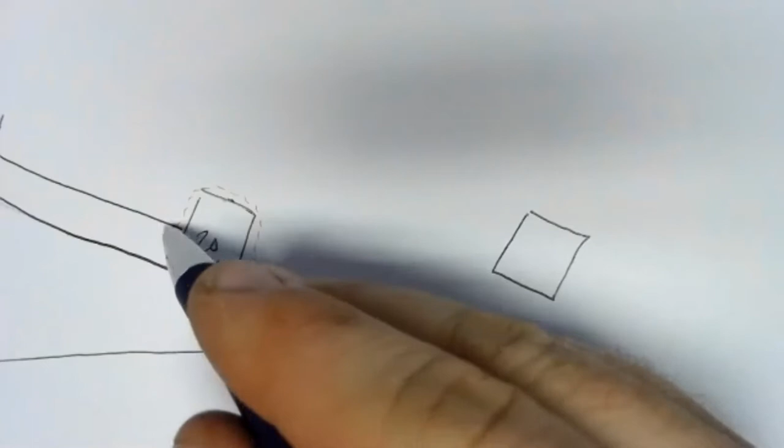So let's go over to the right side here and we'll draw our free body diagram. The free body diagram is going to start with the body, and I'm going to draw it in basically the same kind of orientation. But remember, the point of the free body diagram is to eliminate all those things that are supporting the object. And anytime something touches or crosses that system boundary, there must be a force there.

So I think everyone could agree here there must be a force on the box due to the tension in the wire. The wire or the rope crosses the boundary pretty clearly there. And then we also have weight pulling down. We have this 20-pound force pulling down.

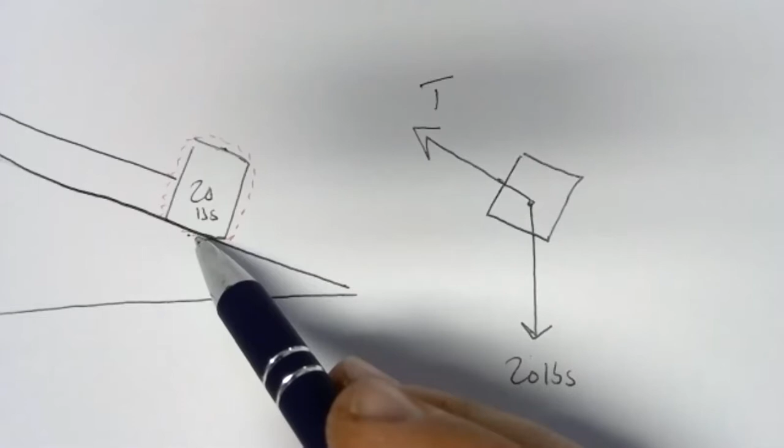But there's another force here, because just these two forces, if you think about them, can't be in equilibrium. Because if you had something pulling down at the same time as something pulls up and to the left, this thing would move. This isn't a tug of war, no one's winning. These two forces are helping each other and pulling off in this direction, off to the lower left. If you added up those two vectors, you'd get something off to the lower left. There must be another force in the system, and there is: this force of contact between the surface of the ramp and the box.

The surface of the ramp exerts a force on the box, just as if you were standing on a floor somewhere. If you stand up wherever you happen to be, your feet are planted on the floor. The floor is pushing up on you to cancel out your weight. You are in equilibrium because gravity's force is canceled out by this force exerted by the floor. Surfaces like floors generally exert forces perpendicular to their surface. So if you're standing on a floor, you're pushing down due to your weight, and the floor is pushing you up to cancel that out, perpendicular to the floor.

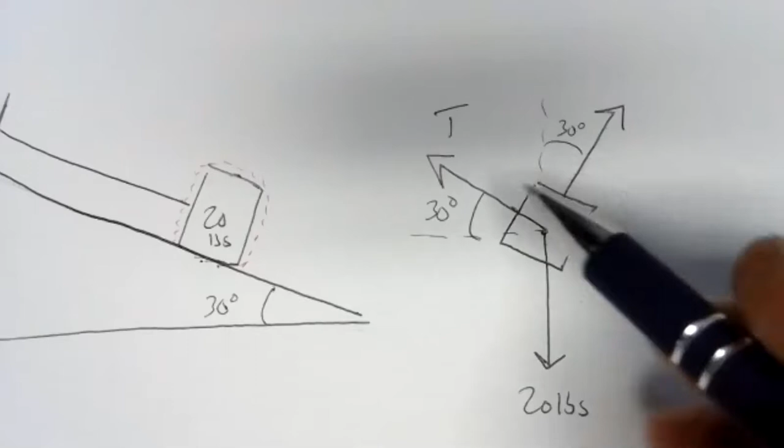There is a perpendicular force here also, but because of this 30-degree angle, that force is up and to the right by an angle of 30 degrees. So if we put some angles in here, that's 30 degrees because the tension is parallel to the ramp. This one's 30 degrees because this force, what we call the normal force — N stands for normal.

Normal has fewer syllables than perpendicular, so it's easier to say. The normal force is perpendicular to the surface. When things are normal in math and vectors and such, they're perpendicular.

Now that has a chance. This free body diagram has a chance of being in equilibrium. You could buy that these three arrows pulling in the way they're doing should cancel out, or at least have a chance of canceling out. There doesn't necessarily look like there's going to be a clear winner here.

So that's what the free body diagram looks like. Now, in order to do any math with the vectors that we've got here, we've got to define a coordinate system. And if we use our traditional coordinate system, where horizontal is x and vertical is y, we can break up those forces into components.

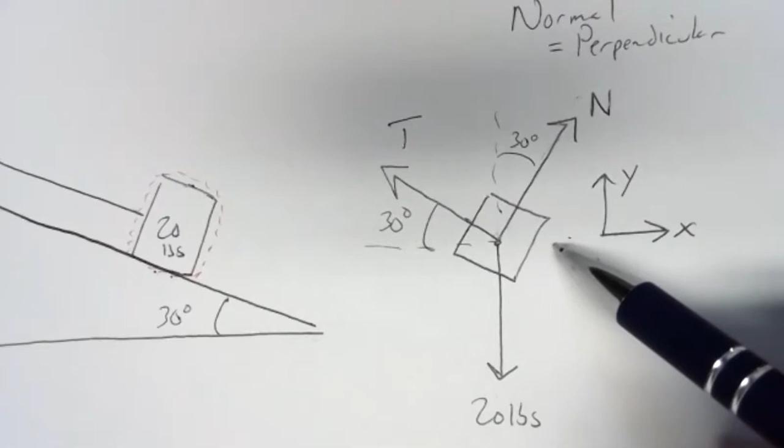You can figure out how much of this normal force is in the y direction and how much is in the x direction. How much of the tension is in the x direction and the y direction. How much of gravity is in the y direction. And then you've got your equations of equilibrium. You take your sum of forces, set them equal to 0. With this setup, you will end up with a set of simultaneous equations.

But we did a problem similar to that last week. So if you are not feeling too clear and comfortable solving realistic problems with simultaneous equations, go back and look at the videos on that — I think that was last Wednesday's class. You can go back, follow the procedure there, and you'll be able to figure out values for T and for N.

Does that help a little bit with the setup? Yeah, any questions there? I think I have a better shot at getting it now. We'll probably have people with questions on Wednesday night — not everyone's necessarily gotten a chance to look at it yet, but we'll likely have questions on this one. So I'd probably end up working it out, and I'll also show you another way to approach this problem that can make the math a little bit easier. But you certainly have the tools at this point to handle this problem, and we've done an example similar enough that involves similar math to solve it. Any other questions on the homework?

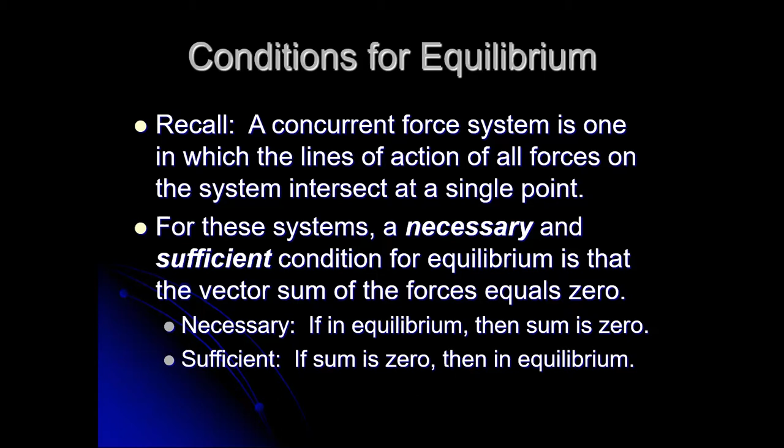We're going to see in a second, though, it's not true for non-concurrent force systems. In non-concurrent force systems, we can have the sum of forces equal to zero, but not be in equilibrium. And you might wonder, well, how can that be? How can we possibly have the sum of forces equal to zero, but not be in equilibrium? Well, let's try it out with an example.

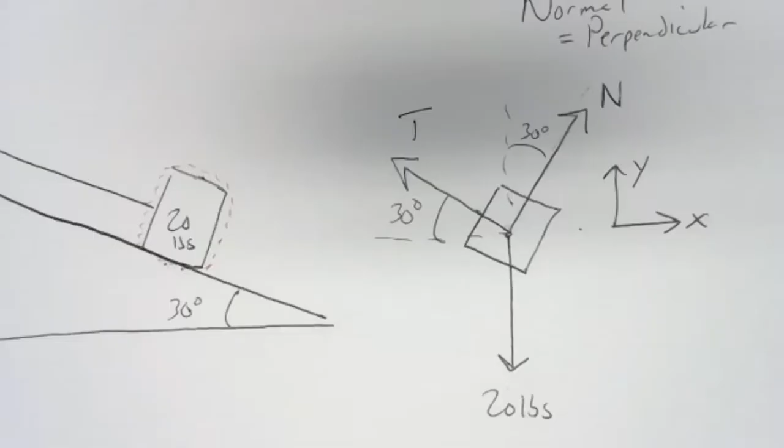Now, since everything we're going to be doing is in a flat plane, we only have two options for moments, just like we did with weight and balance. We either have counterclockwise moments or clockwise moments—only two options. So get used to thinking about, as we work on different problems, the direction moments are in, whether they're clockwise or counterclockwise.

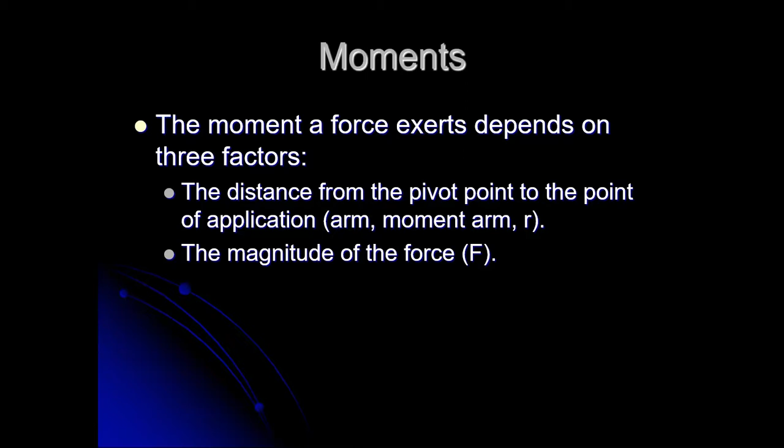Then here's the factor that we didn't have to deal with in the A&P program. We have an angle involved. There is an angle between the line from the pivot point to the point of application and the line of action of the force. That angle matters. How big or how small that angle is will affect how much moment we have.

Now, we ignored the angle in the A&P program. We said it was always going to be 90 degrees, and we do some fairly extreme things in the A&P program to make sure that's true.

Think back to what you did in weight and balance last semester or in a previous semester. Before you could do your weighing of the aircraft to figure out the center of gravity, which was basically just figuring out moments due to the weight at different locations, what did you have to do to the airplane? Anyone remember? So what did we have to do before we rolled the airplane up onto the scales or as we were lifting it on the jacks?

I know it was a while ago. Make sure everything was located in the right location. There's that, you had to make sure it was equipped properly and all that. But there was something a little more fundamental, something you had to go to the TCDS maybe to figure out, or something you had to measure as it was being lifted or rolled up. The empty weight, well, that's eventually what you were measuring.

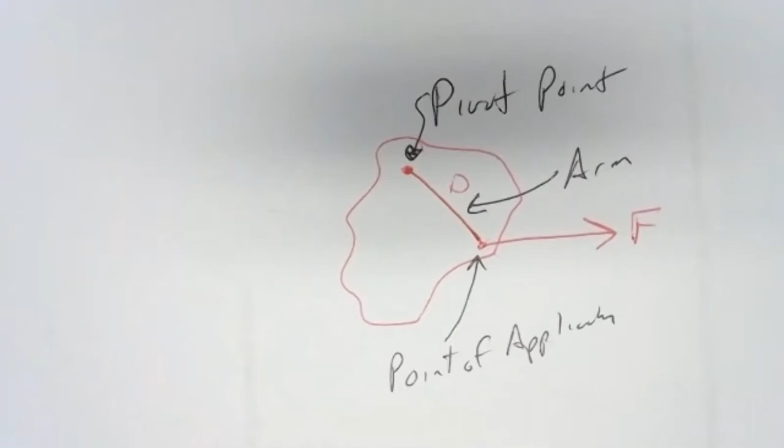Then there's the arm. The arm is the distance between the pivot point and the point of application of the force generating the moment. So if we go back to our drawing here, we've got our pivot point - that's right there. This would be our arm. And right there is our point of application, that's where the force is applied. Now, if we look at the line of action and the direction of the line from the pivot point to the point of application, we get an angle - that's our angle there.

Now, the closer that angle is to zero, the less moment we're going to have, because if the force is pulling right along the arm, it's not causing rotation. On the other hand, if it gets closer to about 90 degrees, then we're getting maximum moment or maximum torque. So the amount of moment we get depends on what this angle is. The closer that angle is to 90, that is, the closer the force is to being perpendicular to the arm, the more the moment is. The closer the force is to being parallel to the arm, the less the moment is. We'll come back to that in a second.

So some important points with respect to moments. Most of these we know from A and P, but this is to summarize that, to review that. When we've got angles involved, only the perpendicular piece of that force, the part that is perpendicular to the arm, contributes to the moment. That's an important idea, and I'm going to illustrate that for you in a second. Forces that push or pull directly on the pivot point, that is, their line of action shoots right through the pivot point, have zero moment.

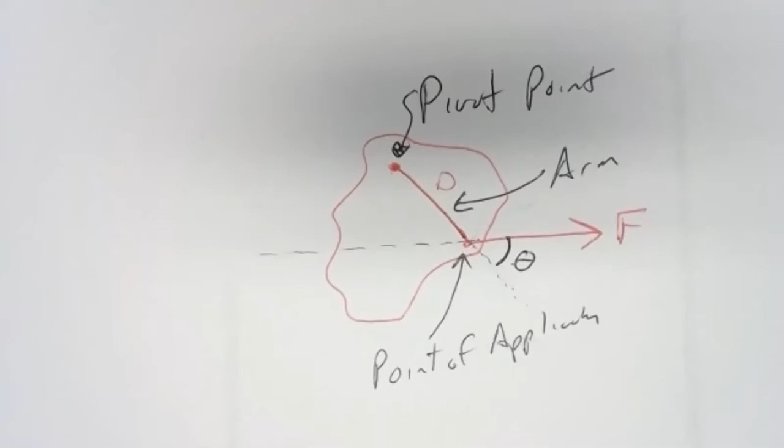So think back to what we've worked on with respect to vectors. This force is a vector, and vectors can be broken up into components. There's nothing saying we can't make this force into two components, one that is parallel to the arm, we could call it F parallel, and one that is perpendicular. We have a perpendicular component. Any force can be broken up into components.

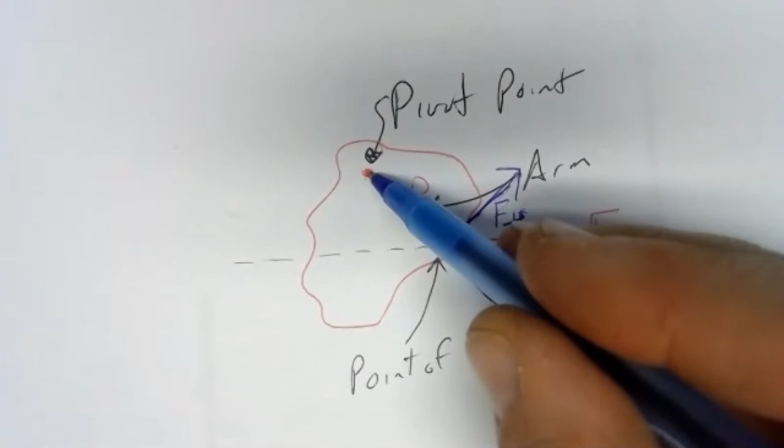If we picked our coordinate system so that our axes are along the arm and perpendicular to the arm, we could figure out how much of the force is perpendicular and how much is parallel. The parallel part doesn't contribute to the moment because its line of action goes right through the pivot point. So the moment due to the parallel part is zero - parallel force gives us no moment.

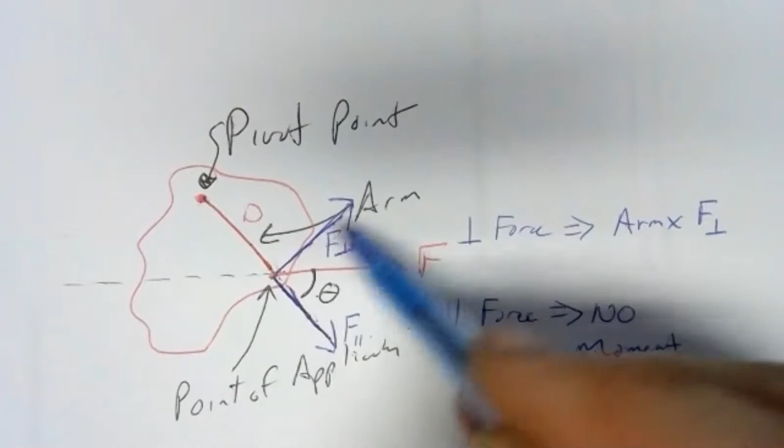The perpendicular force, that gives us our moment. And the amount of moment is the arm times how much force is perpendicular. So if we know this distance from the pivot point to the point of application, and we know how much of our force is perpendicular, we just have to multiply those two.

If we know this angle, we can use some trig to figure that out. Our perpendicular piece is over here - that's our opposite side. The trig function that goes with opposite is sine. So typically with the angle defined this way, the perpendicular component involves the sine of the angle. That's why when the angle's small or zero, we get very little moment because the sine of zero is zero. When the angle is perpendicular, we're at 90 degrees, the sine of 90 degrees is 1.

So the angle here controls how much of the force actually creates moment. All we have to do when we want to find the moment is find the perpendicular force. If we know how much force is perpendicular to the arm, we just find that amount of force, multiply by the arm, and we've got our moment.

So let's try that out here.

We do have to have a pivot point specified. You cannot just say you've got a moment of 32 foot-pounds without specifying what point that's about - 32 foot-pounds about the datum, 32 foot-pounds about the nose wheel. There has to be a reference point. It's just like measuring an angle - you can't just say 30 degrees. It has to be 30 degrees from horizontal, 30 degrees from vertical, clockwise, counterclockwise, all of that.

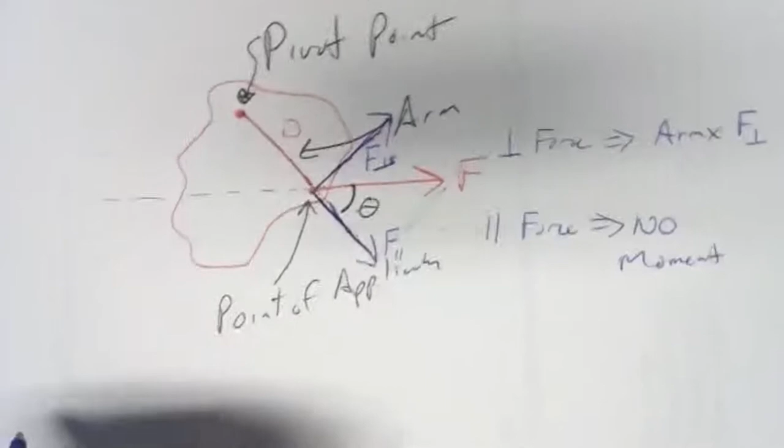Moment is force times distance, so we could write that down here. The equation essentially for moment is going to be: moment is the perpendicular force times the distance from the pivot point. Well, we have a perpendicular force of 60 pounds times the distance of 10 feet. That'll give us 600 foot-pounds.

Now we have one more thing we have to add to this, and that is the direction. Moments have direction to them - there are only two possible directions, clockwise and counterclockwise. You may remember from weight and balance, we made a choice about what moments to call positive and what moments to call negative. Since we only have two options, it makes sense to label one option positive and the other negative.

In the A&P program, and generally in weight and balance, we normally draw the airplane with the nose to the left. So clockwise moments tend to be those that take the nose up or the tail down - those are considered positive, while counterclockwise moments are considered negative. Well, in the end, that's arbitrary - there was no other reasoning there other than someone deciding that's what we want to do. The reason they picked it that way is to minimize the number of negative signs they would get when doing weight and balance problems.

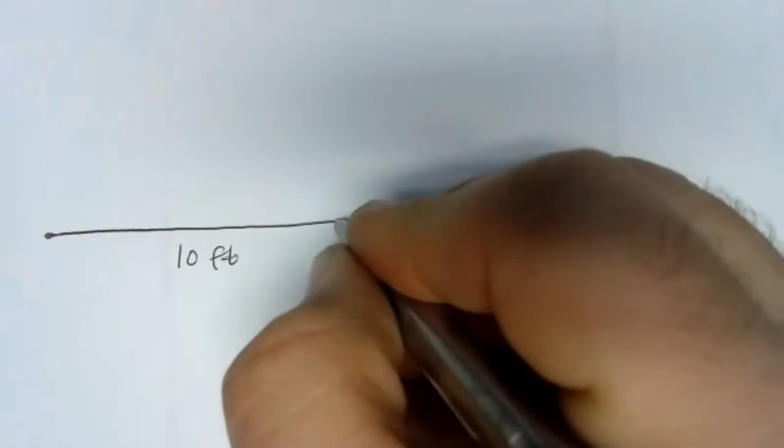Now let's say we have something like that. We've got this force at an angle, and let's make that angle 30 degrees. So if we have a 30-degree angle there, we're going to have to break this force up into components. Let's draw it out here on the board. We've got this 10-foot beam, and applied right at the end, we've got 60 pounds of force at an angle of 30 degrees.

To figure out how much moment we've got about that pivot point, we've got to figure out the perpendicular component of the force. For figuring out the moments, we don't care about what the parallel component is, so we don't need to know the adjacent side here. What we really need to know is the opposite side. Because if we break this up into the opposite side and the adjacent side, it looks sort of like that. That'd be our adjacent, that would be our opposite. Pick that up and move it over there.

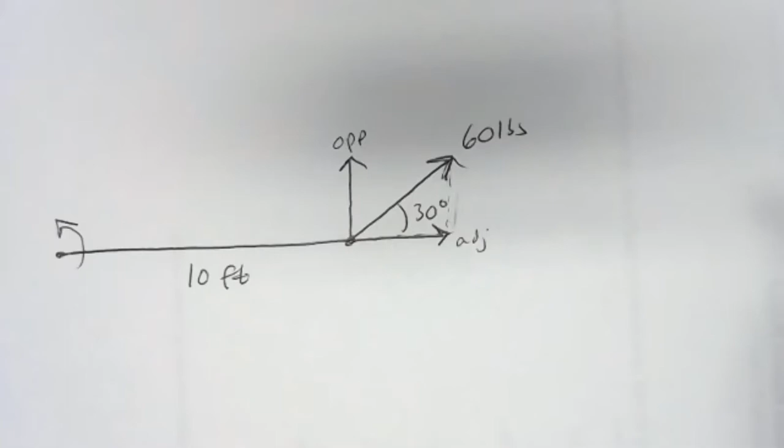Take a second here and figure out what's going to be the perpendicular component. How much force are we going to have for the opposite side, or the y component, if we use our regular coordinate system here, x and y? What is our y component going to be for this 60-pound force?

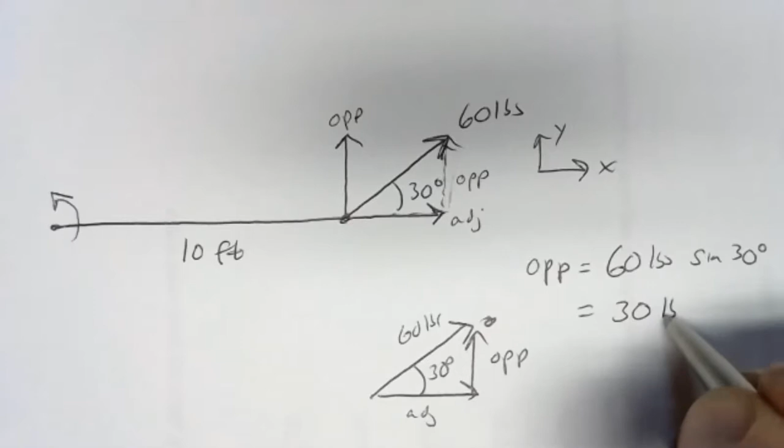So it's the opposite side. We're going to take it off to the side, kind of do - we've got 60 pounds, we've got the adjacent side, we've got our opposite side, 30 pounds. It's going to be 30 pounds. The opposite side goes with sine. So the opposite side is 60 pounds times the sine of 30 degrees. Sine of 30 degrees is 0.5, according to our calculator, and 0.5 times 60 is 30 pounds. So there's 30 pounds of force here perpendicular to the pivot point, or perpendicular to the line between the pivot point and the point of application. That's the only force that's creating a moment.

Now, I think everyone would agree, if you think about your intuition on this, if that 60-pound force is pulling up and to the right, there's definitely going to be rotation here. There's going to be a moment here, but there's not going to be as much as if 60 pounds was perpendicular. It's like trying to open up a door by pushing at an angle rather than pushing perpendicular to the door itself. So we're only catching a piece of it - we're catching half of it, but that adjacent side has much more.

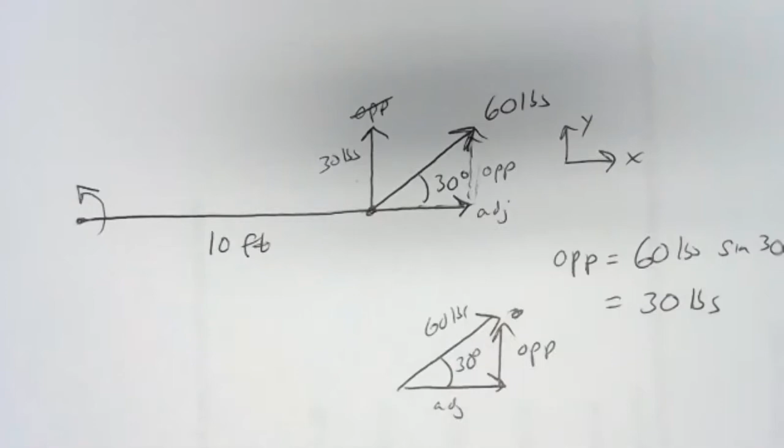That's something you could figure out, but we don't really need to here. We only need that perpendicular component, and that perpendicular component goes with the opposite side, which goes with sine. So we've got 30 pounds, 10 feet away. The moment is the perpendicular force times the arm. So we've got 30 pounds of force times 10 feet of arm. That's 300 foot-pounds. So we've got 300 foot-pounds of moment, and it's counterclockwise.

So it'd be positive 300 foot-pounds. So those are some of the issues that we have to deal with respect to moment. When we have a moment involved, or we've got to find a moment, you've got to be focusing on that perpendicular component of the force. The parallel component does not contribute to the moment. Only the perpendicular component does.

So effectively right here, taking that sine is the same thing we do when we're leveling an aircraft. We're making it so that the forces and the arms are perpendicular. So all we have to do is just multiply the two together. The hard work in balancing an aircraft and doing the weight and balance is leveling it. The hard work here is using sine to figure out that opposite component.

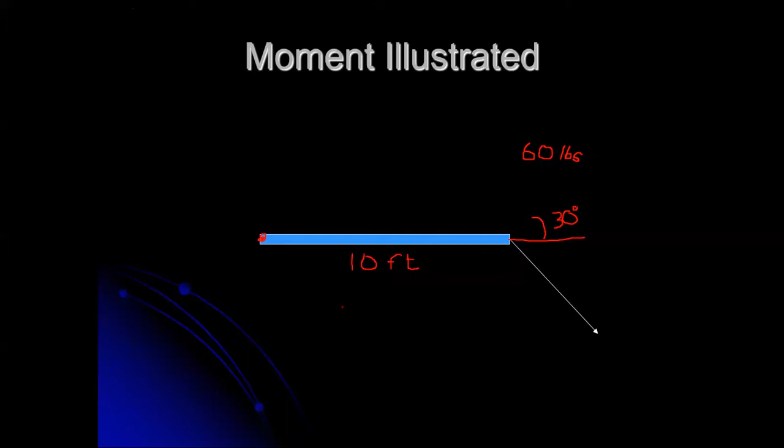So if we flip the direction around, sign would change to a negative moment. Now, how are moments drawn? Moments are technically vectors. And while they're vectors, they have some sort of directionality to them.

Because we're stuck living in a flat plane, those two directions are just counterclockwise and clockwise. In 3 dimensions, a moment could be in any direction you want. And it's part of what makes working in 3 dimensions a lot harder than working in 2 dimensions. So usually moments are represented in 3 dimensions, but since we're dealing with 2-dimensional problems, we only have 2 options for our moment. Positive and negative will do the job to distinguish the two.

We can use a sign. And typically the way it's usually referred to is by the handedness of the rotation. A right hand rotation is positive, while a left hand rotation is negative. So it's another example of the right hand bias, I suppose, in science, engineering, and technology. Right hand seems to be good, left hand seems to be bad. How a right hand rotation works, let me see if I can show you this here on the page.

So there's my hand. Right hand rotation, if you curl your fingers in the direction of rotation, then your thumb points out at you. A left hand rotation would be in this direction. If you used your right hand to do a left hand rotation, your thumb would point down.

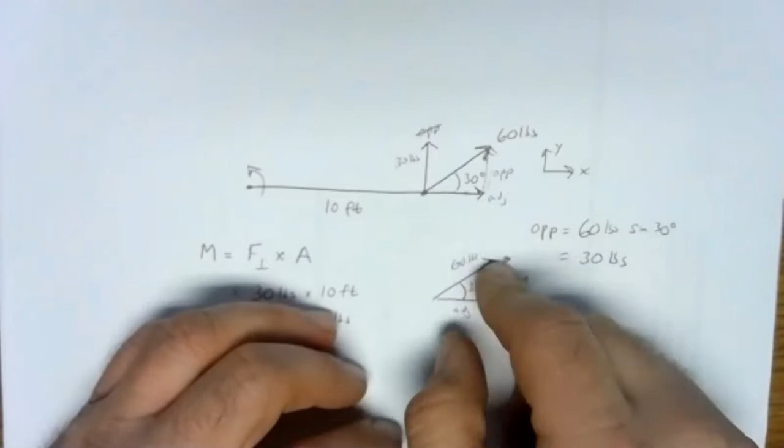So left rotation versus right rotation. We usually use counterclockwise or clockwise. That works too. But the right hand rotation is something else you might see referred to out there. But right-handed rotation, right hand is counterclockwise. Left hand, either that way or that way, would be clockwise.

So how does this help us with equilibrium? Well, if a system is in equilibrium, it can only be in equilibrium if there's no moment. If there's a net moment on the system, then we don't have balance. You might remember from weight and balance that one of the definitions of balance is when all of the nose down moments and nose up moments add up to zero. Well, that's just another way of saying clockwise and counterclockwise rotations add up to zero, no net moment.

If there's no net moment, the sum of moments equals zero, then we have equilibrium. If the sum of moments aren't zero, then things would start rotating. We have torque, we have a net torque, and things are going to start rotating. So a system can only be in equilibrium if the sum of moments about a point equals zero. And this is a true statement. It's a mathematical theorem. It could be proven. We're not going to prove it, but it can be. It's a useful benefit to us, though.

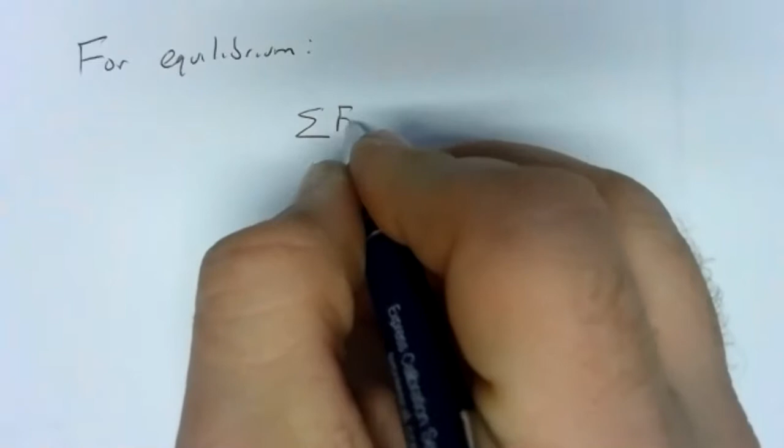So for equilibrium, in order to have it, we need our sum of forces in the x direction equal to zero, and our sum of forces in the y direction equal to zero. Our forces all have two components, so our x components have to add up to zero and our y components have to add up to zero. And our sum of moments about some point, which I'll just label P, must equal zero as well.

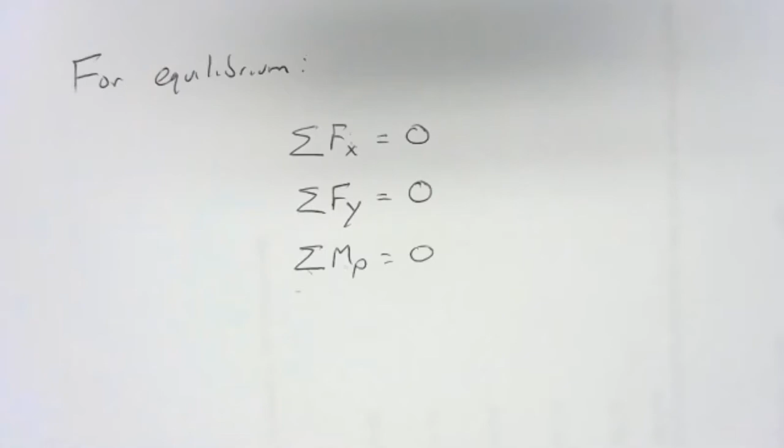So we have three equations. In a non-concurrent force system, where moments are a thing, we end up with three equations. Now that seems more complex, and it is. We have three equations, but it's also more powerful, because with three equations we can handle three unknowns. In two equations, we could only handle two unknowns, two missing pieces. But now with a third equation, we can handle three unknowns.

And although it seems at face value that this would be more complex, in practical problems that tends to simplify things, because usually tied up in our moment equation is something we're going to need for one of these two equations that we would otherwise need simultaneous equations or something like that to get. So the moment equation, although it's extra, on top of what we've already dealt with for concurrent problems, does add a lot of useful information, and it makes it so we can solve more powerful, more practical problems.

So in general, we need all three of those to be true. It's a necessary and sufficient condition: if we're in equilibrium, the sum of forces and the sum of moments will be zero, and vice versa. If the sum of forces and the sum of moments are zero, we're guaranteed to have equilibrium. So that gives us our equations of equilibrium, that the sum of forces and the sum of moments equals zero.

So let's see how this works. We have just about enough time for an example problem before I give you some to work on your own in the practicum session. So let's see how this can work. Here is a non-concurrent force problem.

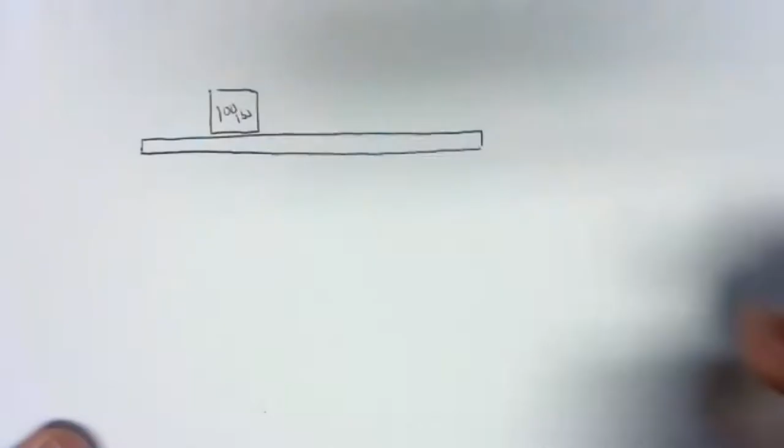So here we've got this 100-pound box sitting there, and let's make this thing, we've got a little roller right here, a couple of rolling pins or wheels that it's sitting on. Now, as long as there are no forces to the side, this is fine. It's not going to roll away on us.

Let's put some geometry on the problem here. We'll put some distances in. Let's say we've got 4 feet there and 6 feet there.

So with what's drawn on the page, we can figure out some things. What we're typically trying to figure out in these types of problems, and these are the types of problems we'll be mostly working on this week and a little into next week, is what the supporting forces are. We've got this load placed on this beam, and we want to know how that load is distributed to the supports.

If you think about this like a bridge going over a river, when things go across the bridge, they're pushing down on it. That weight has to be distributed to the supports, to the abutments that support the bridge across its span.

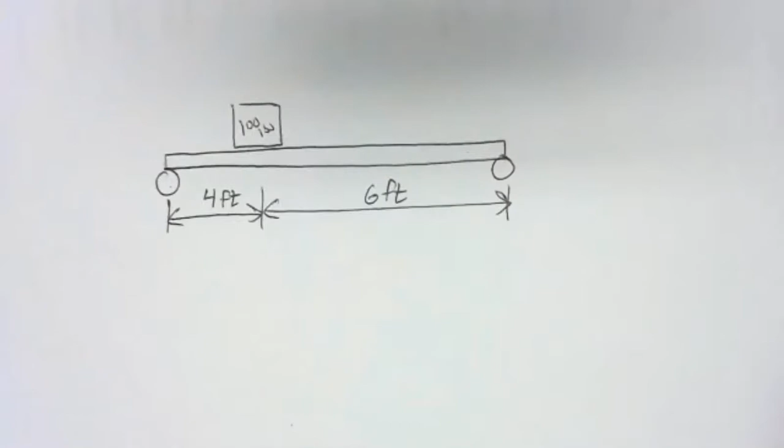That's usually what we're trying to find, the support forces. Now those support forces only exert a force on the beam when we put a load on it. So if there's no 100-pound load, there is no support force. The beam doesn't weigh enough to really load up those supports.

This is similar to something we looked at briefly a little while ago. When you set something down on, say, a table, that table has to generate a force to oppose the weight of whatever you set down. It has to generate a supporting force.

In a sense, you can think of the structure as reacting to the load you've put on it. There is action and reaction: the action of setting the load down on the table, the reaction of the table generating a force to hold that weight up.

The support forces here are doing the same thing. When we set this load down, these supports are going to react, and they're going to react with just the right amount of force at those ends of the beam to keep this thing in equilibrium.

So the body that is of interest here is the beam itself. The beam is our body. So if we draw our system boundary around the beam, then we can draw the free body diagram of that beam.

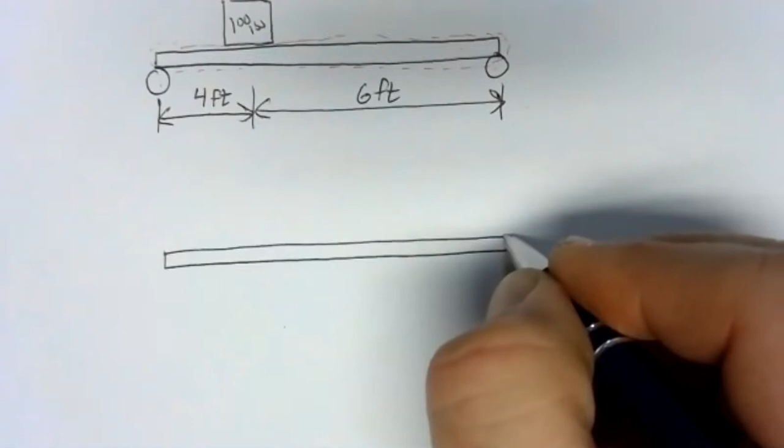Remember what the free body diagram shows: it shows the body with the imposed forces, the applied forces, and with the support forces. And remember that when you've got that system boundary, anything that crosses it or touches it has to be represented. So right here, we've got a 100-pound force pushing down.

It's helpful in these types of problems to label the support points, and those are usually at the ends of the beam. I'm going to call this one A and that one B.

Now these two rollers, they're going to have to push up on the beam. Otherwise this thing can't be in equilibrium. If this thing's pushing down, there needs to be something to push up on it to counteract it, to be in equilibrium. But we don't know what those are going to be just yet, so we're going to have to call them by some symbols.

Since these are reaction forces, it's traditional to label them with the letter R. And to distinguish what point they're at, we label them with the letter of the point that they represent. So this is at point A, and this is at point B.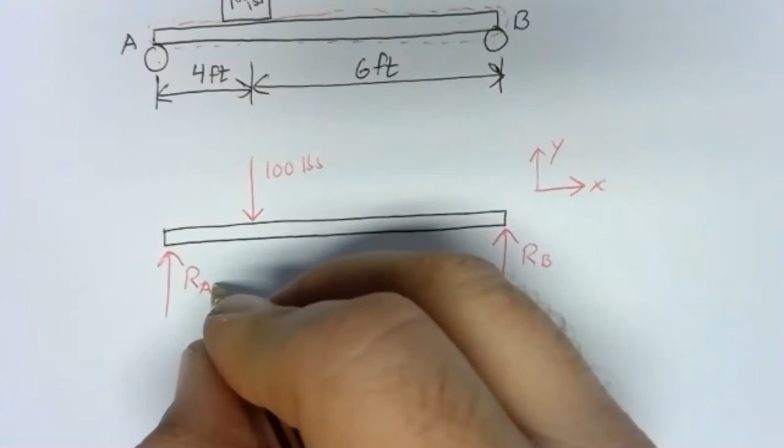Then, to help us out in the future, because this is a very simple problem and they get more complex as we gain skill with them, we can label the component direction here. Both of these point in the Y direction. If we use our traditional coordinate system, X and Y, both of these are in the Y direction. It's helpful, and helps us get our equations of equilibrium faster, if we label these with the Y component. So we have two unknown forces here.

We have RAY, the reaction at A in the Y direction, and RBY, the reaction at B in the Y direction. I've drawn this specifically below where the dimensions are here, so I don't have to redraw those. It's clear that 100 pounds is 4 feet away from A, 6 feet away from B, and the whole beam is 10 feet long. So there's our free body diagram and our coordinate system.

Is anything not making sense about how I got the free body diagram?

All right, so let's build up our equations of equilibrium. The first two are going to be the ones we've been doing all along, which we did last week, so ones you should be reasonably familiar with. Let's do our sum of forces in the X direction.

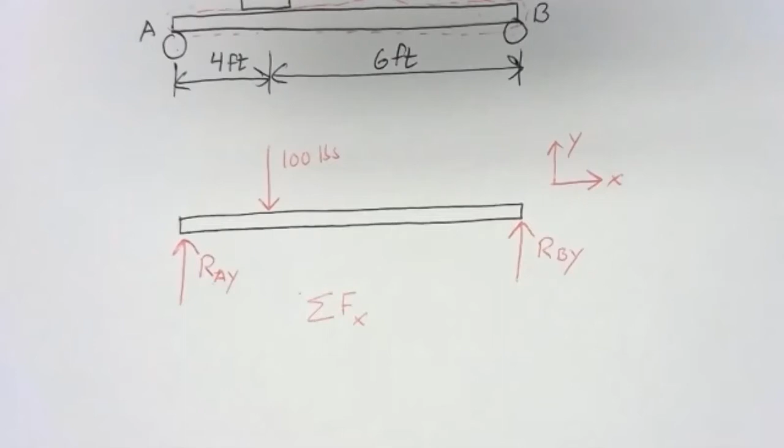If we go through the forces in the problem, we could do the whole formal process we've been doing in previous problems, label these as 1, 2, and 3, and break out the components. But since everything's basically in the y direction, we can just go through each piece. In fact, in practical problems, these forces are most often already broken up for us. They're already in x and y components, so it's a lot easier in these types of problems to just read things off.

To make sure I don't miss anything, I always go left to right across the beam. I start at the left end and go to the right end. If we look at each of the three forces we've got here, RAY doesn't have an X component, 100 pounds doesn't have an X, and RBY doesn't have an X component. So I've got a whole lot of nothing in my X direction, so my X direction sum just says nothing.

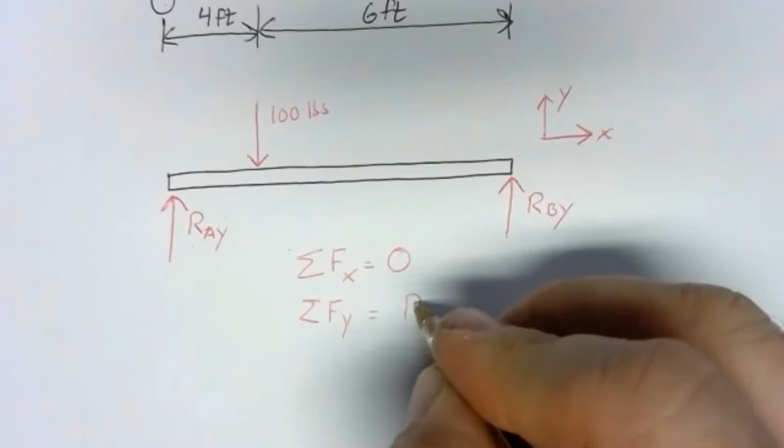If I take my sum of forces in the y direction, however, I see something a little bit different. In the y direction, I've got RAY, and that points up, so it goes into the sum positive. I've got 100 pounds, but that 100 pounds points down, so it's negative. And then the only other force in the problem is RBY, and RBY is in the positive direction. So that's our sum of forces in the y direction: we have 2 up and 1 down.

Now's where we get to the part about moment. We've got to use our third equation because we can't solve this. If we set these equal to 0 now, we've got too many unknowns in one equation. We don't know what RAY is, we don't know what RBY is, so we can't solve for the other one. We need that moment equation to untangle the mess.

So we need moments. To find the moments, we need a pivot point. I'm going to pick a pivot point arbitrarily here. I'm going to pick point A as my pivot point. Now, it's arbitrary, but generally you will simplify a problem if you pick one of your support points as your pivot point.

As we work more of these problems, you'll get to the point where you can just kind of read off the moments as you go along. But here, let's do this a little bit more formally. Let's look at our three forces: we've got RAY, we've got the 100 pounds, and we've got RBY.

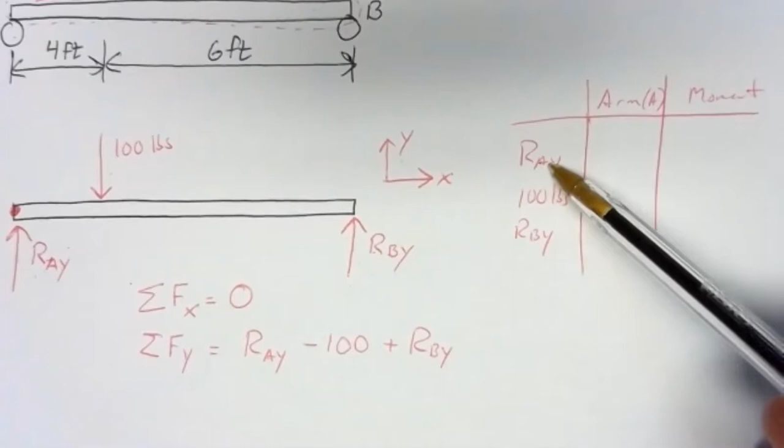So let's try and figure out what the arms are relative to our pivot point, which is point A, for each force. Well, how far away from the pivot point is RAY? Hopefully I hear 0 there. It's pushing on the pivot point, so the arm is 0.

Now, how about this 100-pound force? What's the arm for the 100-pound force? How far away from the pivot point is the 100 pounds? 4 feet. It's 4 feet. So we got 4 feet there.

How about RBY? Remember that once we pick our pivot point, we've got to measure to all the positions from that pivot point. I like to, when I teach weight and balance, say imagine the end of your tape measure is welded to your datum, so everything has to be measured from that point. So how far away is RBY from the pivot point? What's our arm there? 10 feet.

By far, the most common error I see people make in working these problems is forgetting about the arm for this far point force, the one that's farthest away. If you get ridiculously high answers for your forces, like you're supporting 100 pounds but get something like 1,000 as your support force, chances are you've forgotten the arm somewhere. So you've got to be careful.

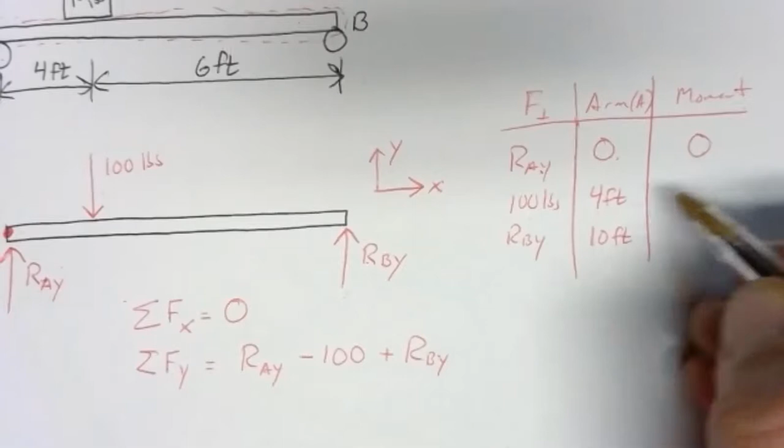Well, let's figure out our moments here. RAY we don't know, but its arm is 0, so we know its moment. Arm times force is moment, and all of these are perpendicular, so no sines or cosines needed. The moment is 0. We have our 100-pound force 4 feet away. We can multiply those and we get 400 foot-pounds.

Now RBY is 10 feet away. So if we're pivoting at A and we push up with some force here, we would certainly expect this thing to rotate. So RBY definitely has a moment associated with it. We just can't write down anything but an expression for it. The best we can really do is say it's going to be 10 times whatever RBY is. If RBY is 3 pounds, then it's going to be 30 foot-pounds.

So those are our moments. Now, I haven't taken into account direction yet. I haven't set the signs on these yet, just like when we did with our sum of forces. We'll do that in the sum. So let's do our sum of moments about point A.

Well, RAY pushes right on the pivot point, so it's got 0 moment, so we don't even need to consider it. We've got our 100-pound force 4 feet away, so that's 400 foot-pounds. We don't really need to include the foot-pounds in there, but 400 foot-pounds.

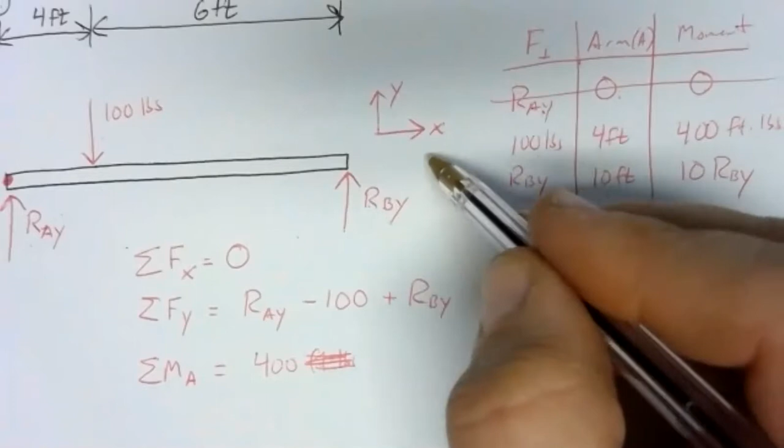But then we have to figure out direction. If we're pinned at A and we push down, this thing's going to rotate clockwise, and clockwise moments are negative. And to help us remember that clockwise moments are negative and counterclockwise moments are positive, we make a little addition to our symbol for the coordinate system.

We add in the direction of positive moment. Remember what these arrows are telling us: direction of positive X, direction of positive Y. Remember, right-hand rotations are positive. So we'll often write that little curly arrow labeled M, reminding us that counterclockwise moments, or right-hand moments, are positive.

So we have 400 foot-pounds clockwise... so that goes into the sum negative. Then we've got RBY. RBY is pushing up, so that's going to create a counterclockwise moment. Counterclockwise moments are positive, so we'd have plus 10 RBY.

So there we have our 3 sums: the sum of forces in the X direction, the sum of forces in the Y direction, and the sum of moments about a point. To make these a set of equations, we have to use the fact that we are in equilibrium, and in equilibrium, each of these sums must equal 0.

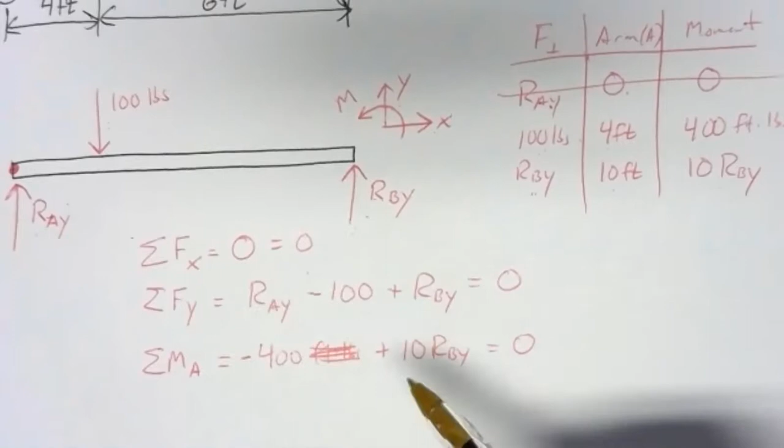Just like in our concurrent problems, we go through and set the sums equal to 0. Well, that first sum tells us a whole lot of nothing: 0 equals 0. True, but it doesn't buy us a whole lot. The other 2 equations are a little more useful. We've got RAY minus 100 plus RBY equals 0, and we've got minus 400 plus 10 RBY equals 0.

Well, we can't solve this one just yet, but we can solve this one. If we add 400 to both sides, we'll get 10 RBY equals a positive 400. Divide both sides by 10, and RBY equals 40. Don't forget the units, that's 40 pounds.

So that's telling us that RBY is 40 pounds. Now that we know that, we can go into our X direction, Y direction equation and replace RBY with 40 pounds and solve for RAY. Negative 100 plus 40 is negative 60. RAY minus 60 equals 0. So RAY is 60 pounds.

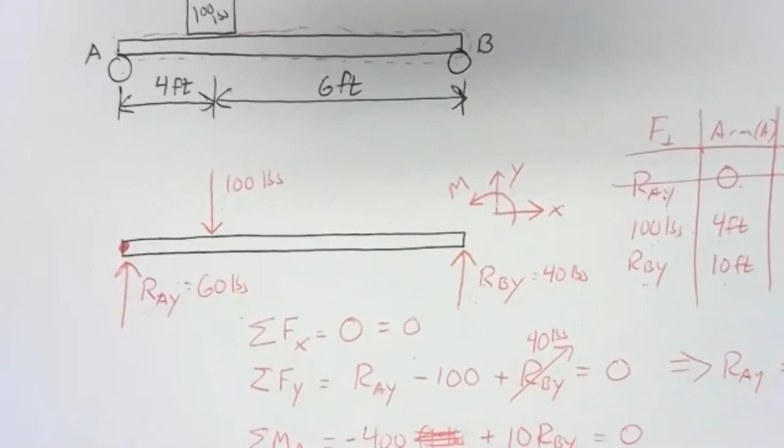All of this is happening because that 100-pound force is sitting on that beam. If you move that 100-pound force, how would you expect the load to change? Well, if that 100 pounds was sitting much closer to A, A would be supporting most of that 100 pounds. If it's far away from B, B isn't going to be supporting very much of it. It might support a little, but not much. The load is closer to A than it is to B, so we expect A to handle more force than B does.

So this makes sense. It at least looks like a reasonable way to load the beam. So let's step back here and review what we've done.

We had this problem: a 100-pound box sitting on a beam, and we wanted to find the reactions at the supports. We wanted to find out how hard those supports had to push up to keep this thing from moving.

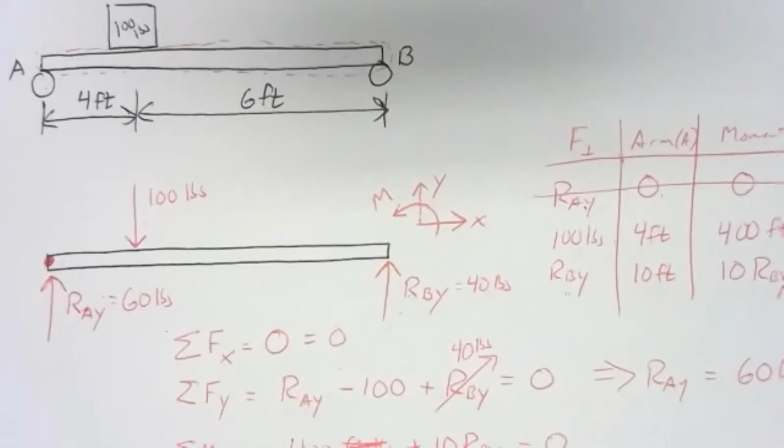We drew our free body diagram where we found our support forces, RAY and RBY. We took our sum of forces in the X direction and found nothing. We took our sum of forces in the Y direction, which basically said the forces pushing up have to be counteracted by the forces pushing down: RAY minus 100 plus RBY. And then we found our moments.

We recognize that this is a non-concurrent force problem because the lines of action of our forces do not intersect, so we needed moments. We picked a pivot point at A, and then we found the moment of each of our forces relative to that pivot point. We made a little table here, and if that table helps you, go ahead and use it.

In future problems, we'll just kind of build the equations directly. We've got no moment here. We've got 100 pounds 4 feet away, so that's 400 clockwise, negative, and so on. We'll go a little bit more quickly on future problems, but if that table helps you, definitely make it until it makes sense to you.

We found our sum of moments had to be 0. We could solve that equation, and that gave us our support at B. And then knowing the support at B, we could back solve into the Y direction equation and find the support force at A.

That is, in essence, the basic non-concurrent equilibrium problem. Now, there's a lot more to know about these supports and the different kinds of supports we can have, and those factor into a lot of the things we'll be doing in Wednesday's class, and a little bit in Monday's class as well. We'll look at supports and how the different supports are represented in the free body diagram.

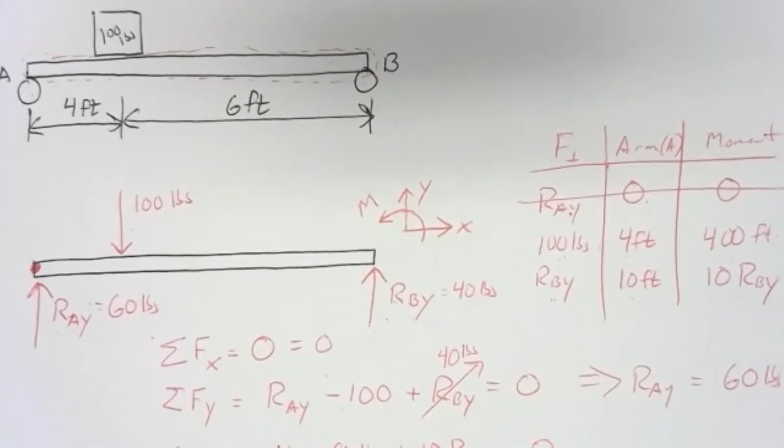I'll do another example in the practicum session, and then I'll give one for you to do to practice on your own. So let's finish up the formal notes here, and then we'll take a break.

So next time we'll be getting into our support mechanisms. We'll look at things a little more sophisticated than rollers, and we'll look at how these reaction forces are represented in free body diagrams. We'll spend most of our time on Wednesday night practicing on non-concurrent force problems.

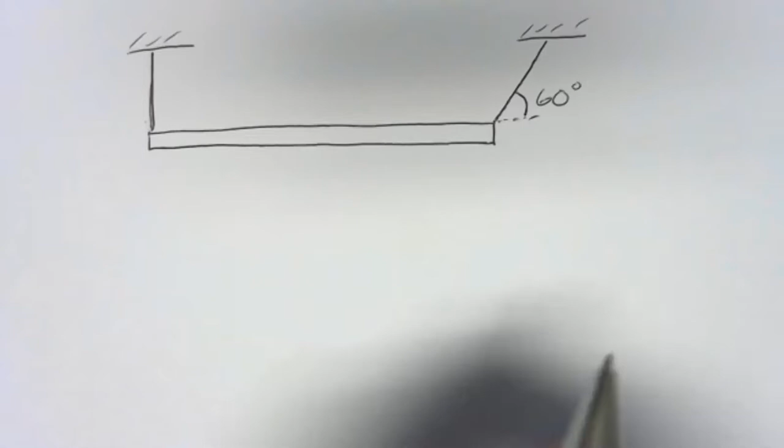Let's load up this beam with a little bit larger forces than what we've been using here. We'll switch our units a little bit into kips. Kips is something we talked about briefly at the beginning of the class a few weeks ago. Kips is shorthand for 1,000 pounds.

So instead of putting a 1,000-pound box on this, we can put a 1 kip box on it. The important thing to keep in mind is to make sure we stay consistent with the units. If our forces applied in the system are all in kips, our answers are all going to be in kips too. We're not going to mix. I don't think I have any problems where we mix kips and pounds and play unit games like that. It's just trying to make sure that we get the right amount of the right units, the right answers, and the right procedure.

So let's see here. We'll apply a couple of loads on this one. Let's see, I think we'll have a 2 kip load there. So 2 kips there. And then I am actually going to have a force at an angle here.

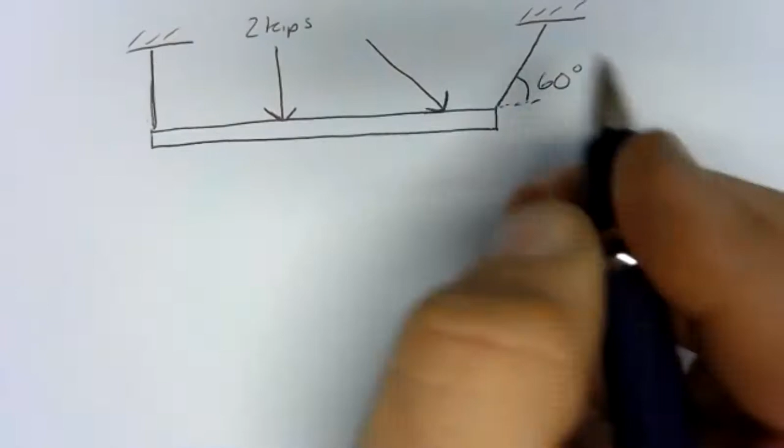So this will have a couple of different factors involved. Let's push this one down at an angle of 45 degrees. So you've got something that's coming in on an angle, and we'll make that 3 kips.

And we'll put some geometry on this. We'll make everything measured out like that. Make this 3 feet, we'll make this 4 feet, we'll make that 1 foot.

Now our goal in this problem is to find the tension in the wires. So we want to find our tension.

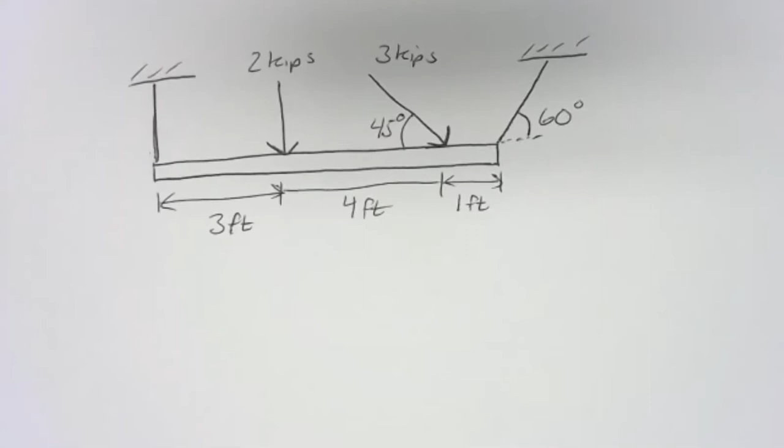This is always the problem with designing a problem on the fly. You have to try to work out the solution ahead of time, and sometimes you back yourself into a corner. So I'm going to change one thing here to make it more realistic, and eliminate this angle. So no angle right there. We're going to try and find that angle, so we'll need a value there. I don't know exactly what that angle is going to be, so we'll call it theta.

So there's our setup, and what we want to find is the tension in the ropes and that unknown angle. This brings in a fair bit of what we've worked with before as an example. The one I'll have you work out on your own will be a little simpler, but this is a good overall practice of a number of skills we've worked with so far.

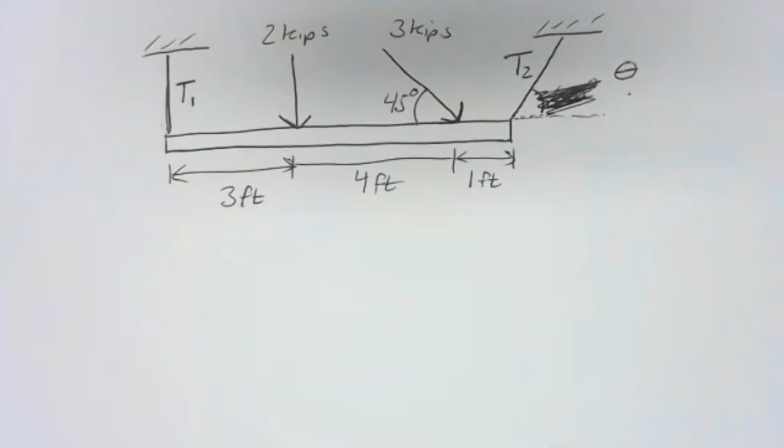So I'm going to call this one, let's call that T1, and we'll call this guy T2. So we've got two ropes, and we want to find the tension in each of those ropes and the angle T2 makes to horizontal.

Let's start by figuring out our free body diagram. The beam is going to be our body, so we'll keep that. But everything that touches it, we have to represent in our free body diagram. So if we have this system boundary wrapped around here, everything that touches or cuts through or pierces that boundary needs to be represented by a force.

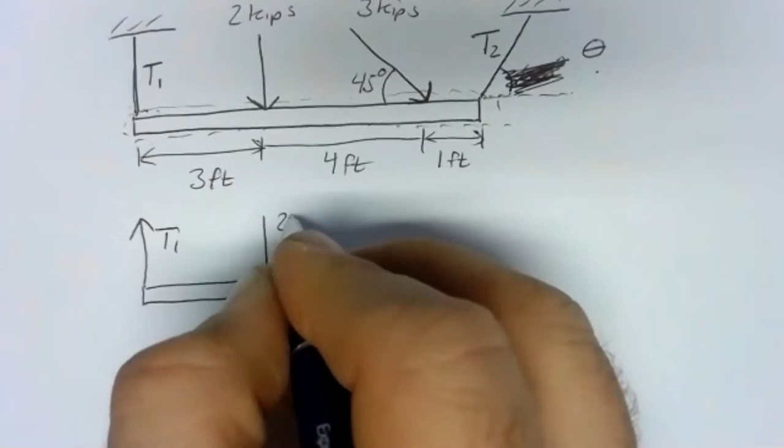Now, since ropes can only be in tension, they must be pulling up here. Couldn't be in equilibrium if these weren't pulling up. So we have T1 pulling up there, we have our two kips pushing down there, we have our three kips at 45 degrees pushing down there, and then we have this unknown T2 at our unknown angle.

We can also define our coordinate system. To the right is positive x, up is positive y, and counterclockwise moments will be positive.

Anything not quite making sense on the free body diagram?

All right, so we've got our free body diagram. We have to proceed a little more carefully in this problem because it's more complex than the last problem we looked at. We've got a couple of forces at angles here, so we're going to have to deal with the angles, just like we did in the problems last week. When we have vectors at angles, we have to find the components of those vectors.

Now, we met this situation a couple times last week where we knew nothing about the vector. And when you know nothing about the vector, it's safest to just label its components as x and y rather than trying to do sine and cosine of the angle and T1 or T2. So I'm going to draw in red my components here so they'll stand out a bit. This one right here, that would be T2 in the x direction, or T2x.

And the vertical component would be T2y. So that's T2 broken up into components, T2x and T2y. Those are going to be easier to work with and solve for than dealing with T2 cosine theta or T2 sine theta. That gives us ugly equations that'll be a mess to deal with.

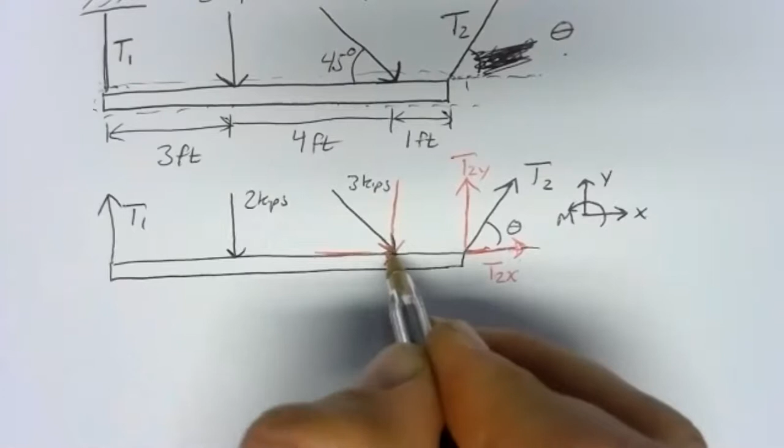If you start drawing over here, you can get yourself into trouble thinking about where that point is, how far away it is, and you go down all sorts of bad paths. The force is applied right there, so that's where I'm going to make the components apply, just like I did over here. The force is applied here, so the components are applied there too. If you keep those clear, you'll have an easier time coming up with your equations.

Now the angle here was 45 degrees, so to figure out our components, we'd need sine and cosine of 45 degrees. Fortunately, at 45 degrees, sine and cosine are the same. So to figure out our components here, which I can label, hopefully you're getting familiar enough with this now that you can just go to your calculator and do 3 cosine and 3 sine and figure out which one they go to.

But if we go to the adjacent piece, that would go with cosine. So 3 cosine of 45, we get 2.1213 kips pushing to the right.

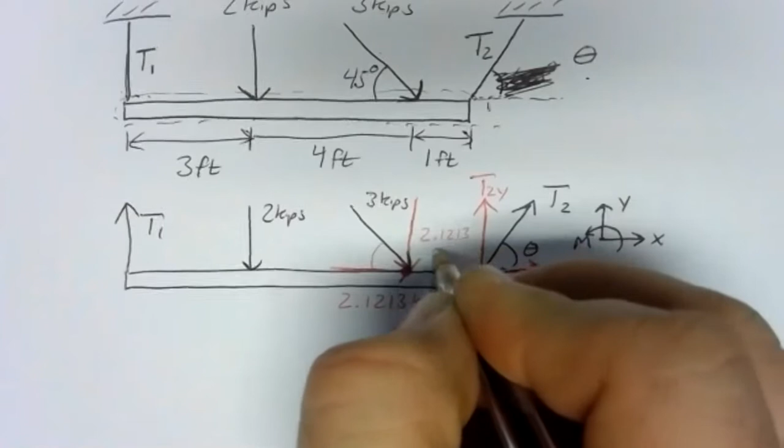And we have, for the vertical component, 3 kips and sine of 45, because that would be the opposite side. That should give us the same thing, 2.1213 kips. And I am keeping 5 sig figs, so I'll round my final answer to 3.

So now we've got all our forces broken up into X and Y components. That'll help us out. Any questions on breaking these forces up?

All right, so let's go ahead and do our sums. Just like a problem we did last week, we do our sums of forces, sum of forces in the X direction and sum of forces in the Y direction. But rather than labeling each of them out and doing the X and Y components, we'll just jump right to it.

Going left to right, I've got T1, that's all Y, so no X. I've got 2 kips, that's all Y, no X. Over here, I've broken up my 3 kips into a horizontal and a vertical. There I do have something to the right. That is 2.1213 kips.

We don't really need to label that. It's to the right, so it's positive. The only other X component I've got is this T2X.

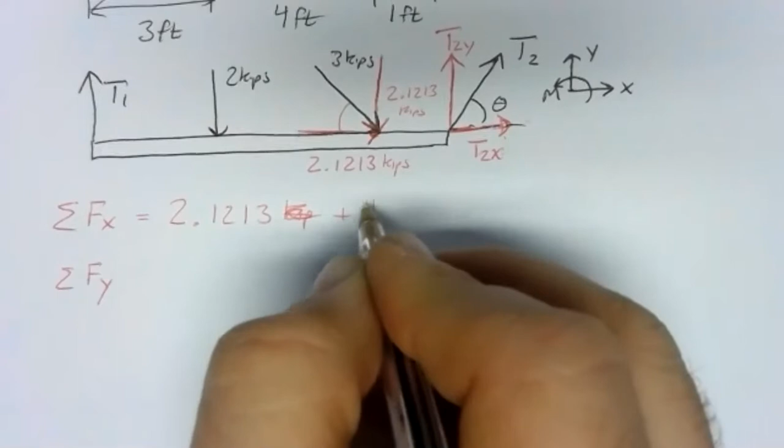And I've made an assumption here by the way this is drawn. You could think of this as something somebody sketched up - they didn't actually go out and build it. They sketched it to see if it would work, to do this kind of analysis. And maybe they weren't sure whether this rope had to angle to the right or to the left, so they took a guess and made it angle to the right.

So we have to go with that assumption. T2X points to the right, so it goes into the sum positive. We'll get a check on that assumption when we do the math. If the answer comes out positive, the assumption was good. If the answer comes out negative, then the assumption was bad, and we'd have to go back and redraw things at the end of the problem to get a better picture of how things look. That's an important idea that's going to come back several times.

So I want to make sure we cover that here. So there's our sum of forces in the X direction. Nothing else in there in the X direction. So let's go to our Y direction, sum of forces in the Y direction.

We've got T1 up, so that's positive T1. We've got 2 kips down, so that'll be negative 2. We've got 2.1213 down, so that goes in negative. And then we've got T2Y.

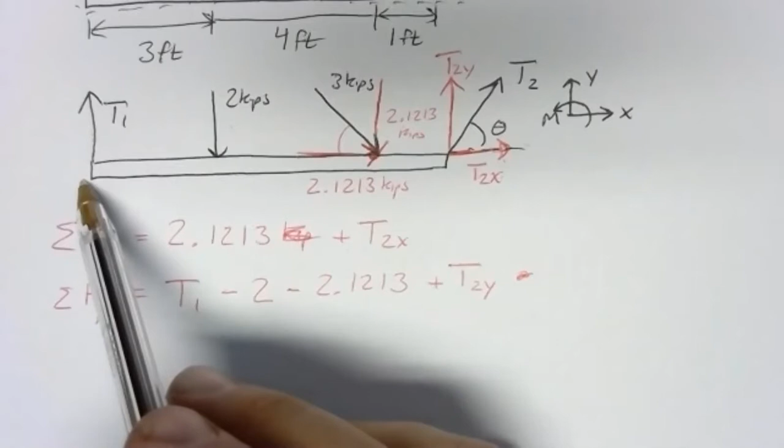Generally, if you know nothing about your supports, any support point will do. We could pick the attachment point for T1, or the attachment point for T2. Since I did the attachment point for the left side in the first example, I'm going to do the right side in this one. So I'm going to pick this point here, which I'll just label B as my pivot point. I want the sum of moments about point B.

So point B is my datum, my reference point. All the arms are going to be measured from B, and all the directions of rotation are going to be considered as if B was nailed to the wall. We've got a pivot point running through that, and everything else is causing rotations about that pivot point. So B is going to be my pivot point here.

Now we can go through and figure out the arms for each of the forces and the amount of moment for each. We've really got six forces to consider: the 4 components in red, which were split up from our 3 kips and our T2 force, and then these other 2 that were already lined up perpendicular. So let's go through each one by one and figure out the arm and the moment.

So for T1, it looks like 8 feet away from our pivot point - got 1 foot plus 4 is 5, plus another 3 is 8. So we've got an arm of 8 feet times a force of T1. What T1 is, not sure, but whatever it is, 8 times it will be the moment involved. Then we have to figure out, is that positive or negative? Well, if we pin at B and push up at T1, that'll cause a clockwise rotation. And according to our coordinate system, clockwise rotations are negative. So we'd have negative 8 T1.

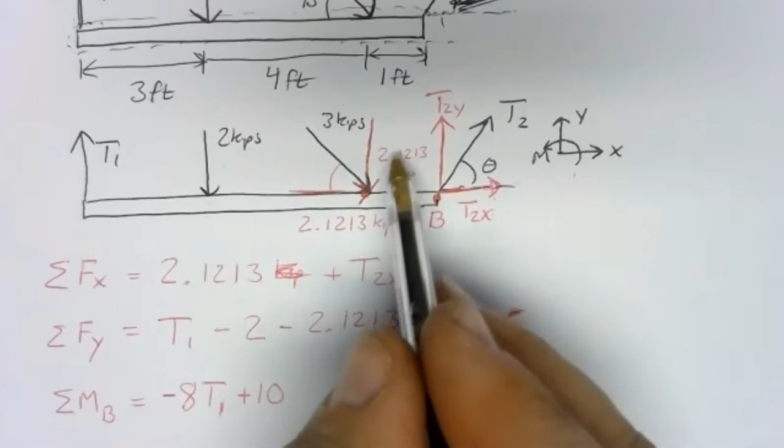So I get a positive 10 kip feet there. Then we've got our 2.1213 kip forces. Now this beam is pretty thin, so the line of action of this horizontal piece goes right through B. That means it has no arm. So the horizontal 2.1213 kip force doesn't generate a moment because it's pushing along the hinge line. It's pushing right at the hinges, so it's not going to cause rotation. Only the perpendicular components cause rotation.

So this 2.1213 kip force does create a moment. It's 1 foot away, so it's 2.1213 times 1, or just 2.1213. Pinned at B, pushing down, counterclockwise, so it's positive.

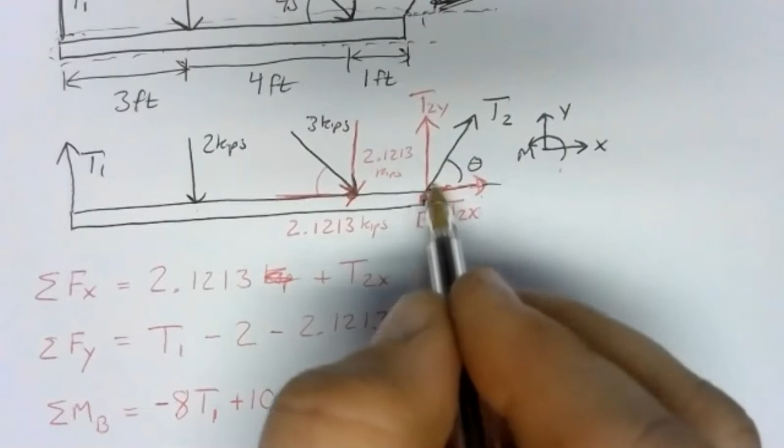And then we get to point B and T2X and T2Y. Well, T2X is pulling on the pivot point, T2Y is pulling on the pivot point, so there's no reaction or no moment there at all from either of those two. The force T2 pulls on the pivot point, so it doesn't create a moment.

So that's all we've got in our sum of moments. We've got -8 T1, we've got 2 kips 5 feet away, so 10, and 2.1213, the vertical part, 1 foot away. So that's our sum of moments. Now to make these into equations, we set them equal to 0.

Unlike the previous problem, now we've got 3 equations. Fortunately, 2 of them are pretty straightforward to solve. The first one only has 1 unknown in it, T2X. The last one only has 1 unknown in it, T1. So since our moment equation is the new equation, let's go ahead and work with that one first.

So first we can simplify it down just a little bit and say it's -8 T1, but then we can combine the numbers together. So the rest of this is algebra at this point. We've got 12.121 - I'm rerounding that to 5 sig figs - that equals 0. I'm going to add 8T1 to both sides, so I have 12.121 equals 8T1. Divide both sides by 8.

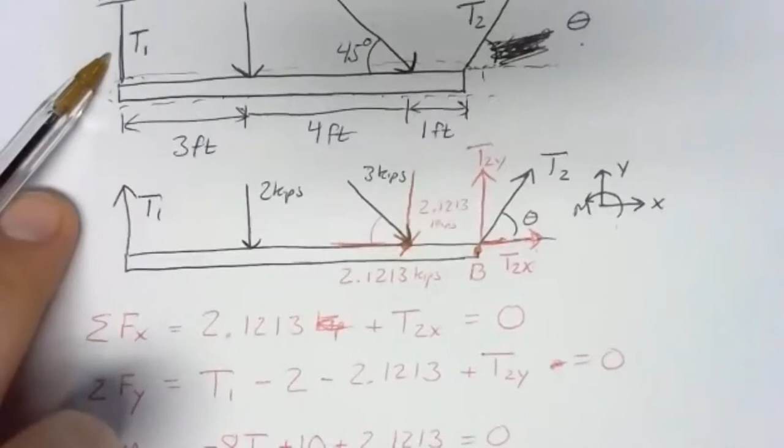So we know what T1 is now. T1 we assumed was up, which only makes sense from the drawing. And we found a positive answer. That means our assumed direction was correct. T1 is 1.5151 kips.

Now that's not the entire story, but it's 1 out of 3 of our variables. So we'll go ahead and write that down over here, 1.5151 kips.

Now let's go to our x direction equation. The x direction equation is pretty easy to solve. All we have to do is subtract 2.1213 from both sides. And if we do that, T2x comes out to be negative 2.1213 kips.

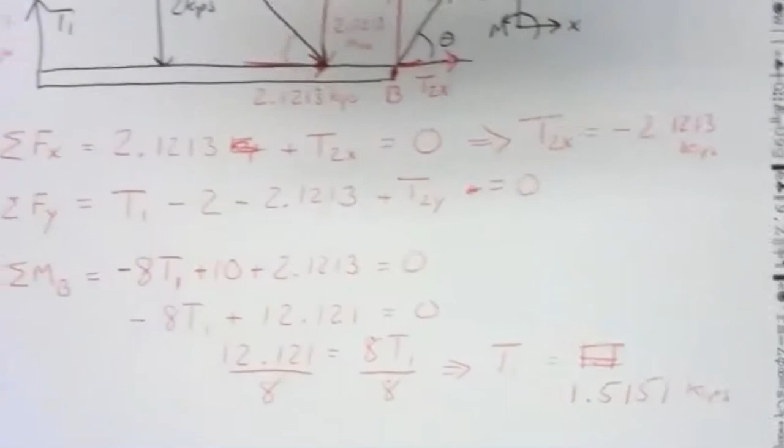So we've got an answer that's negative. Negative answers mean we assumed the wrong direction. We assumed that T2 pulled to the right. But we find out here in this situation, T2's actually got to pull to the left. It wouldn't be physical for it to pull to the right. That's why we get a negative.

We've got to stick with that negative for now, but we'll fix it when we draw a summary at the end of the problem. But for now, we've got our value, at least in magnitude. The x component of T2 is 2.1213. It just happens to be in the other direction.

And then finally, we've got our y direction equation here. I'm trying to block off some of this here so we have some room. Our y direction equation, we can simplify it a little bit here. This would be T1, we already know, is 1.5151 kips.

If we combine the numbers together, we have 1.5151 minus 2 minus 2.1213. So that gives us minus 2.6062 plus T2y equals 0. If we add that 2.6062 to both sides, we get T2y is a positive 2.6062 kips.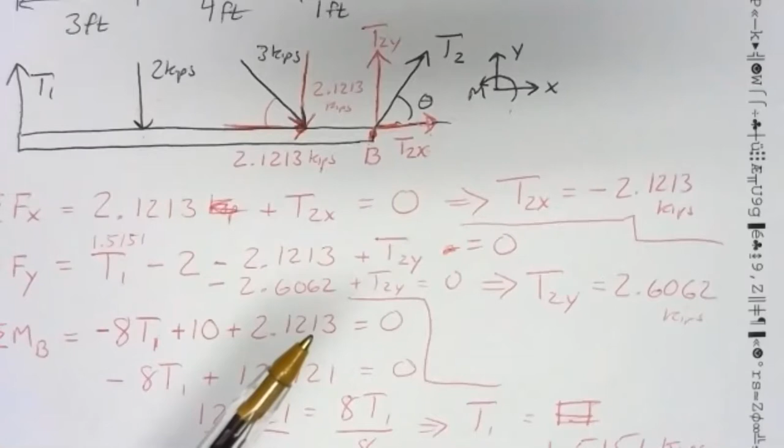So when we have to guess, or a guess is made for us, sometimes these problems are set up like this and you have to figure out the drawing's wrong. So if you get an answer that's negative, that just means that should be in the other direction. So there we've got our unknowns.

So let's fix up the drawing a little bit, and then we'll give our final answers. So if we redraw things a little, let's go back to our free body diagram. If you redraw things, you should always wait until after you've got all the values. Once you have all the values, then you can draw things in the right directions with the right numbers, and then you can finish up the problem.

So here we've got T1, which we figured out was 1.5151 kips. That was our value for T1. We had 2 kips there. We had our 3 kip force here. And then we had T2x and T2y.

But what we find is that T2y is up, and we found that was 2.6062 kips. But T2x has to be to the left. T2x was to the left, and the value there was 2.1213.

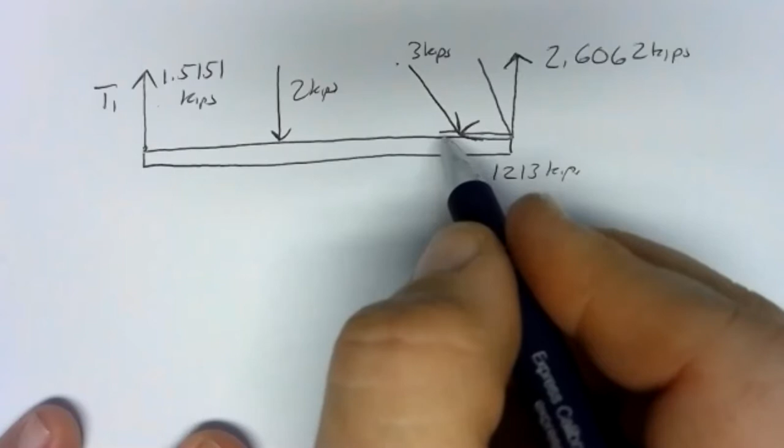That means the supporting rope is up and to the left, which kind of makes sense if you think about it physically. If you are pushing to the right, or something is pushing to the right, there has to be something else pulling to the left to cancel that out. This support isn't doing it because it's just vertical. So it's got to be this support. It's got to be pulling to the left.

To answer the problem, we need this angle and that magnitude. So let's go off to the side here and redraw that in X and Y components. I'm going to draw X first, then Y, so that I can get my hypotenuse in the right place and the angle in the right place. Remember, when you're trying to find your magnitude and direction, you want your triangle to include the angle that you're looking for. So since I'm looking for the angle to horizontal, I'm going to do X first, then Y.

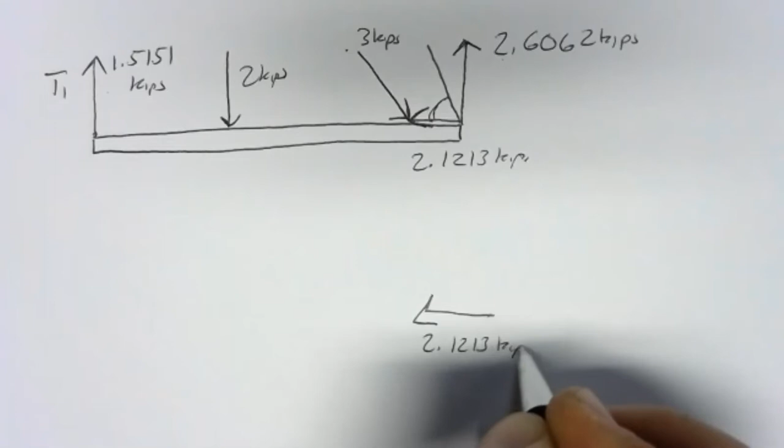So X first, I've got 2.1213 kips. Then I've got Y, 2.6062 kips. My magnitude is there, that's T2. And there's the angle I'm looking for. So we've got 2.6062. Oops, I transposed some digits there. Let's rewrite that down here.

2.6062 kips. So we've got our X and our Y components. You can use the Pythagorean theorem and inverse tangent from here. So this is just like what we've done in the past.

2.6062 squared and 2.1213 squared. Add them together, take the square root. Looks like our magnitude T2 is 3.3604 kips.

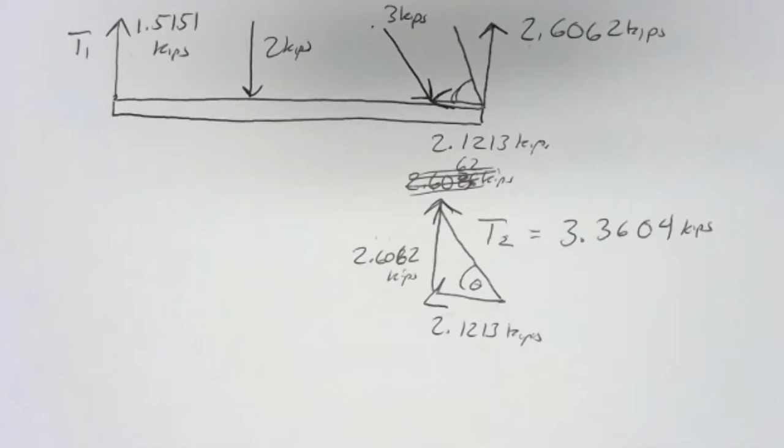And our angle is going to be the inverse tangent of 2.6062 over 2.1213, inverse tangent of opposite over adjacent. So we take our inverse tangent and we get our angle is 50.856 degrees.

So now that we've got our answers, we don't have any other calculations to do. We can round things to our final number of sig figs, which was 3 in this problem. So we'd round T1 to 1.52 kips.

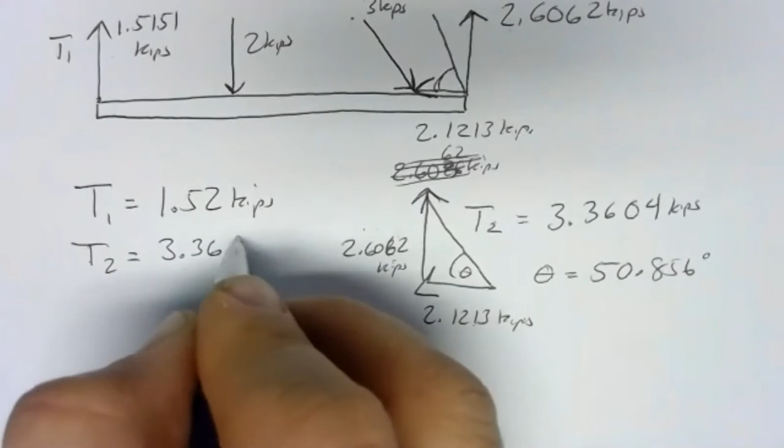We'd round T2 to 3.36 kips. And we'd round the angle to 50.9 degrees. So that's what we'd have for our answer.

So reviewing what we did in this problem, we had a drawing provided for us, which may have errors in it, might not be drawn the way it physically needs to be. Bear that in mind. It happens all the time, not just in problems I make up for you, but problems out there in reality. Somebody hands you a sketch and says, hey, build this or analyze this, and it can't be the way they drew it. And you sometimes have to figure it.

Sometimes you can see it immediately. Sometimes you have to figure it out by looking at the drawing or by doing the analysis and having things not work. So we had this drawing. We drew our free body diagram. We broke up all our forces that needed to be broken up into components.

We took our sum of forces in the x direction, set it equal to 0. We took our sum of forces in the y direction, set it equal to 0. The new thing, we took our sum of moments about a point. I arbitrarily picked point B. You could go back and pick point A and rework the problem and see that you get the same answers. Pick the other end of the beam and try that out.

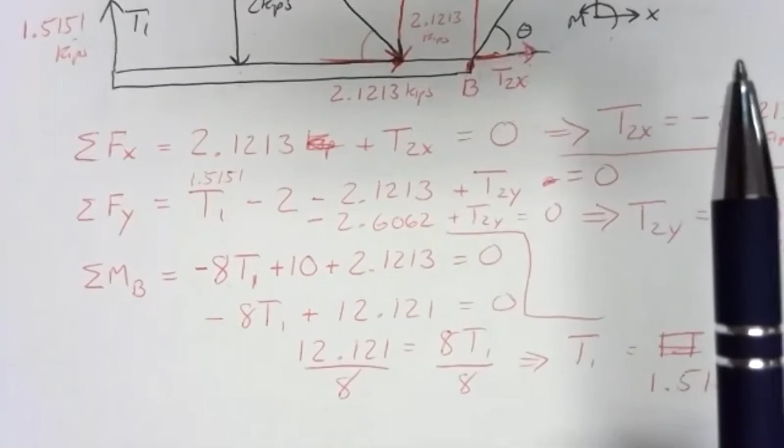We were able to solve the moment equation for our force at the other end. That's usually how it works out. We pick a pivot point at one end, it'll give us the force at the other end. Then we were able to solve our x and y directions. Then the rest was just cleaning up and getting the answer into the final form that they wanted, the magnitude and direction of the unknown forces.

All right, so there's a lot to decompress there. So I would encourage you to step through that one and maybe go back and watch the video again and see how that one worked out. A lot of different concepts coming into play there, especially the assumed directions, the signs, and all of that. Very important stuff, but good to get in early.

So we've got a few minutes left here. So before we go to the next setup, any questions on this one? Any place where you had an issue or something else you wanted to look at on it?

All right, so let's try a slightly simpler problem for you to set up, and I'll give you a few minutes to set it up, and then we'll work through the solution just to fit within the time before class is finished.

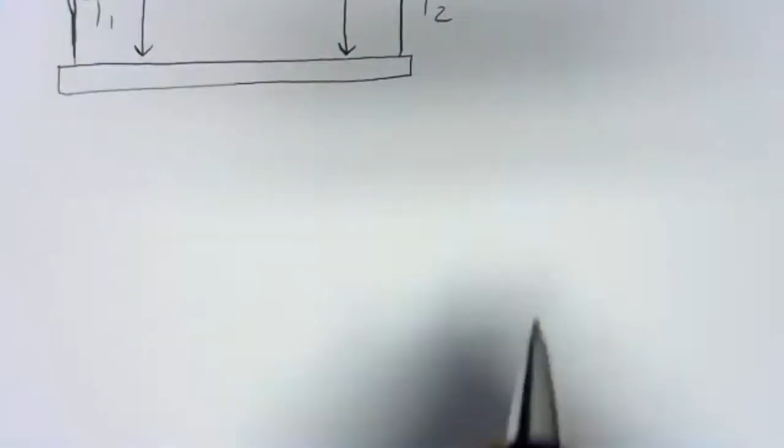So we'll do a similar kind of rope problem here, but this time everything's going to be vertical. We've got T1 and T2. We'll put a 5 kip force there. We'll put an 8 kip force here. And let's see, those are strapped to the ceiling. And then we'll make some geometry here. We'll say the distances.

We'll go with 2 feet, 8 feet, and 3 feet. All right, so the goal is to find T1 and T2.

So take a few minutes, write up a free body diagram, and start doing your sums of forces and moments. In about 4 or 5 minutes, I'll get things set up and we'll do our solution. So I'm going to pause here. If you have any questions, you can ask off the recording as we're setting things up.

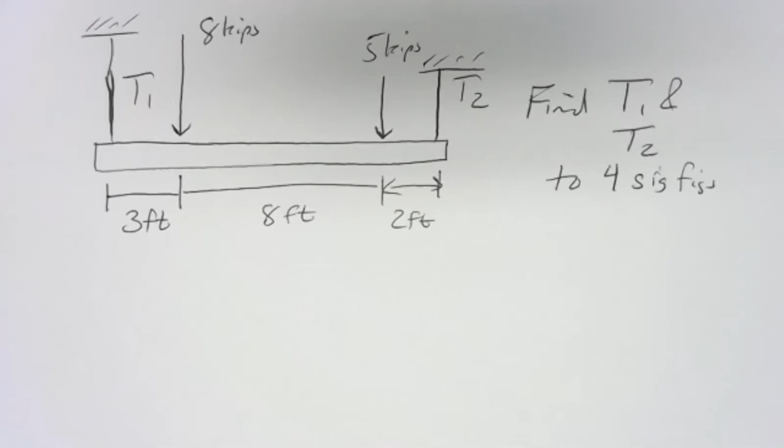All right, so the first step is to draw the free body diagram. To help us out, we can draw our system boundary. Anything that crosses, touches, or pierces that system boundary must be represented. So we've got our beam. We've got T1, and since it's a rope, we're going to pull up. We've got our 8 kip force down. We've got our 5 kip force down. And we've got our unknown force, T2.

We can define our coordinate system. To the right is positive, up is positive, and counterclockwise moments are positive.

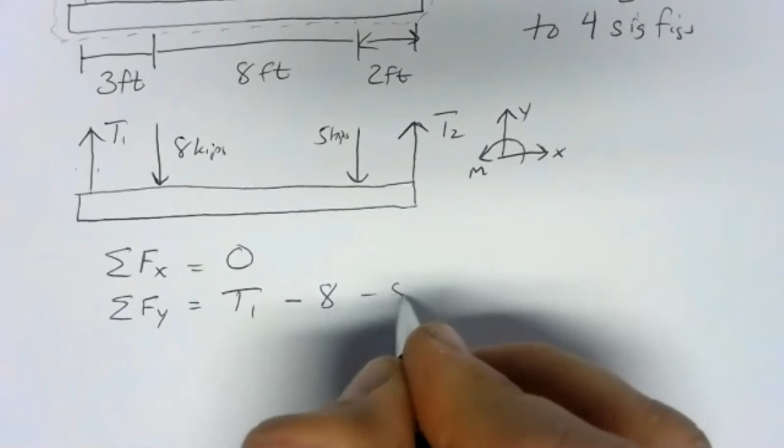So let's do our sum of forces. In the x direction, there's nothing, so that equals 0. Sum of forces in the y direction, left to right: we got T1 up, so positive T1. We've got 8 down, so -8. We've got 5 down, -5. And we've got T2 up, plus T2.

Then we've got our moments. To find our moments, we need a pivot point. I'm going to pick the point right where T1 is attached. It doesn't have to be the exact end of the beam, it just has to be where that support is. So even if there are overhanging sections, they're not going to matter - it's where that support is attached. So I'll call that point A.

Now T1 won't have a moment about point A, it's pulling right on the pivot point. The 8 kip force, however, will have a moment. It's 3 feet away, so I have an arm of 3 feet. All 8 kips counts because it's perpendicular. So 8 times 3, I've got 24 kip feet. Clockwise, if we're pinned and pushed down, we have a clockwise moment. Clockwise moments are negative.

Then we've got our 5 kip force. The 5 kip force is 11 feet away. So we've got 55 kip feet, also clockwise, so negative. And then we've got T2. T2 will definitely have a moment, counterclockwise, so it'll be positive, but it is 13 feet away. So the best we can do is say 13 T2. Don't forget that arm - it's a very common mistake to lose that.

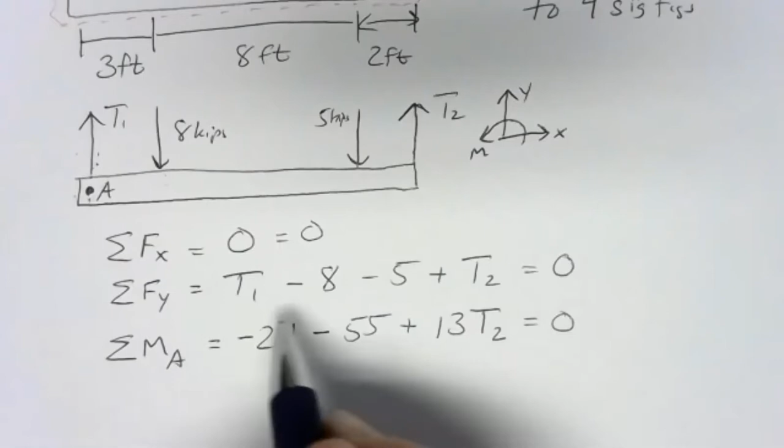Since we're in equilibrium, all of these must equal 0. Well, 0 equals 0 doesn't buy us much. The second equation, we have too many unknowns to solve - we don't know T1 or T2. The third equation, however, we can solve. If we combine together the numbers here, we've got -24 minus 55. That gives us -79.

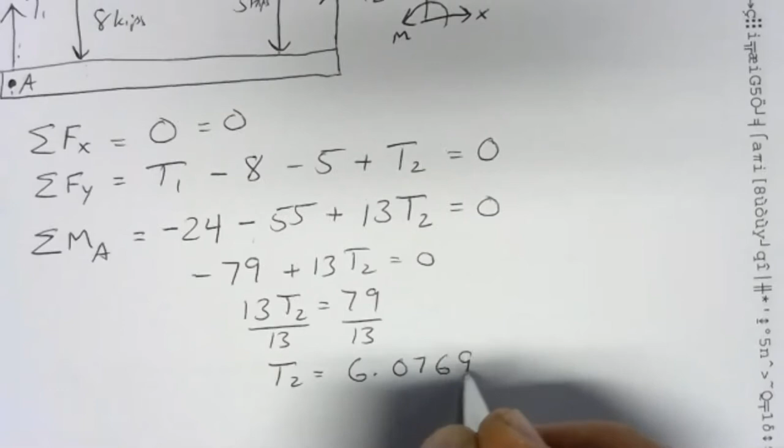Adding 79 to both sides, we get 13T2 equals 79. Divide both sides by 13, and T2 equals 6.07692. Since I want 4 sig figs, I'm going to keep 2 more, so 6.07692 kips for T2. Now that I know T2, I can go and plug it in to solve for T1.

So I've got 6.07692. That equation is pretty simple to solve - just don't be so quick with your calculator that you lose the signs. If you combine it together, you're going to get a negative value here. Remember, you have to add that to the other side, so it'll be positive. So if you're getting into the habit of jumping right to your calculator, just be careful with your signs.

So that's 6.07692. So that'll give us T1 minus all these numbers together give us 6.92308 negative, which when we add that to both sides, gives us T1 is 6.92308 kips. So a little bit more load on T1 than on T2.

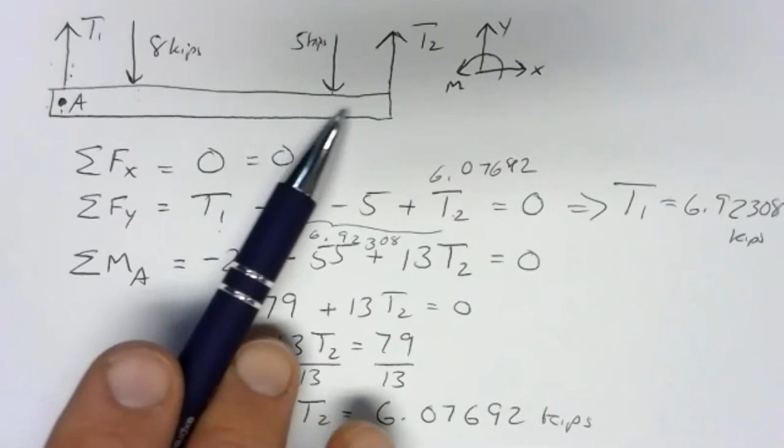And that kind of makes sense because although we've got 8 kips on one side, 5 kips on another, more of it's closer to T1, so there's a heavier load there. So to finish up, we would round our answers to our final number of sig figs. So T1 is 6.923, and T2 is 6.077. Tip: not a bad idea to box your answer in. And there we go.

Any questions there? Nope. All right, so that's it for tonight.